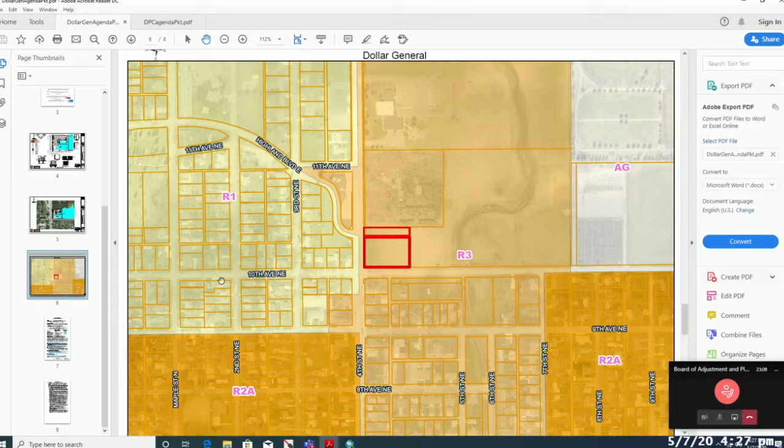The owner of this property is Sandra Jean and Daniel Messelt. The applicant, the buyer of the property, will be Watertown 21569 LLC, owned by Rupi Helmer Group. The property address is 1010 4th Street Northeast, indicated in red here.

The conditional use request is that the applicant seeks approval to operate a neighborhood retail establishment, a Dollar General retail store, in the R3 multifamily residential district, for applications 21-20031 and 21-16034, contingent upon compliance with the purpose of the R3 multifamily district and specific rules governing individual conditional uses.

Neighborhood retail establishment is a listed conditional use for the R3 multifamily residential district. The definition is specific: a generally recognized retail business which supplies commodities on the premises for persons residing in adjacent residential areas, such as but not limited to groceries, meats, dairy products, baked goods or other foods, drugs, dry goods, clothing, and notions or hardware.

Whereas a retail establishment, as opposed to a neighborhood retail establishment, is an establishment engaged in selling products, goods or merchandise to the general public for personal or household consumption, and establishments providing services or entertainment to the general public, including convenience stores, petroleum sales, repair shops, indoor amusement, copying services, health, professional, educational, social services, and other miscellaneous services.

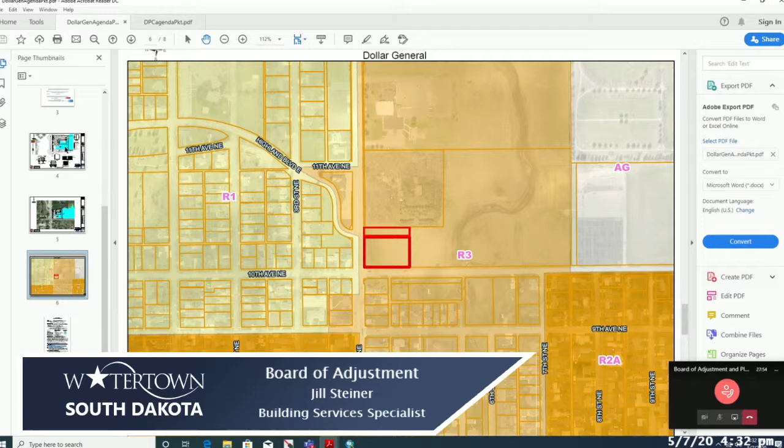So the additional property is for more parking then? It is a change in the ingress, egress. They're going to want to come in off of 4th or the highway, north and south, as you might see here. Before, I believe the parking was a little more to the south, and they were coming in off of 10th Avenue.

Right, because when we had approved it prior, there was some concern about the entrance at that time, which was closer to the corner of 81 and 10th Avenue. That's correct. And then we kind of collectively agreed that they were going to move it back, farther east. And so actually, this would probably work out better the way it looks.

In terms of, and Mr. Chairman, yes sir. Heath VonEye here, I could expand on that. After the previous approval we're talking about, you're correct, we worked through these details on the access off 10th with the applicant, and they were able to meet the required setback from the intersection with that access, but it did not accommodate what they felt they needed for ingress and egress into their site.

So they revised their plan and procured more property to the north to account for an access coming off of Highway 81. The necessity to have that proper setback from Highway 81 on 10th required them to essentially shift their plan and come off of Highway 81. So that's how we've gotten where we're at today, due to that additional property they've acquired for the access off 81.

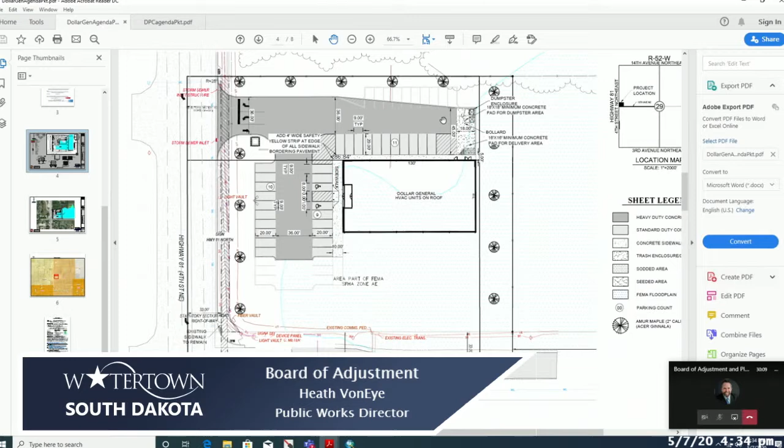I guess I don't know if it's in the packet. I know they provided a turning model, what's called a tracking model, that shows a semi maneuvering into and out of their site for delivery purposes. And it looks to be adequate and appropriate to provide enough space for those deliveries.

Jeff Brink, I work with the Department of Transportation, and at the Department of Transportation we did receive an access permit request for this property. On that request, they go into detail on turning movements and turning radiuses at curb cuts. We look at distances from other intersections as well as the light. So all of that is being analyzed by the state.

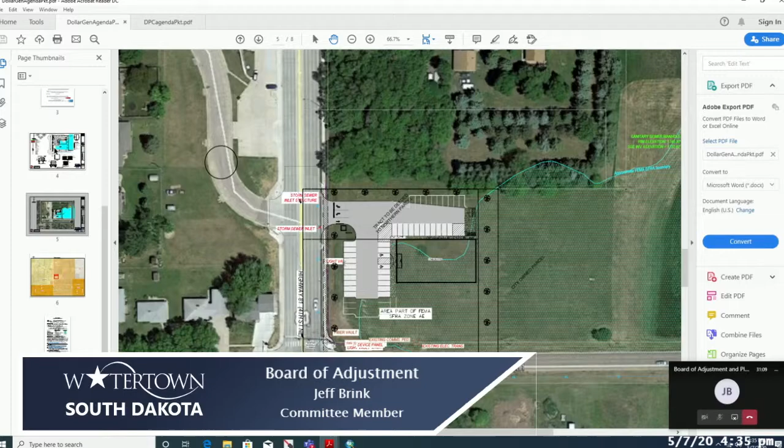The approach location hasn't been approved yet by the state, but we're still in the review process, and I feel like it's very close to being approved. So in those regards, I think at least the DOT feels comfortable with the location of an access and the turning movements.

Mr. Chair? Yes, sir. This is a question for staff: so with the access to come off the highway, if they ever wanted to come and put access onto 10th Avenue, they'd have to come back before this board?

Commissioner Kays, that would be handled administratively under a curb cut permit from the engineer's office. If we were to receive an application for such a curb cut, we would check it against the newly adopted engineering design standards, just as we did for this site's review, to make sure it meets the minimum setback requirements from the intersection, which I believe in this case was about 140 feet.

Thank you. One other quick question: is there going to be screening on the south side of the parking lot adjacent to that residential zone property? Can you see the hand on the screen, Todd? Is this where you're talking about, in this area? There doesn't appear to be proposed trees there, but isn't it a requirement that all commercial uses adjacent to residential uses in an R3 have to be screened?

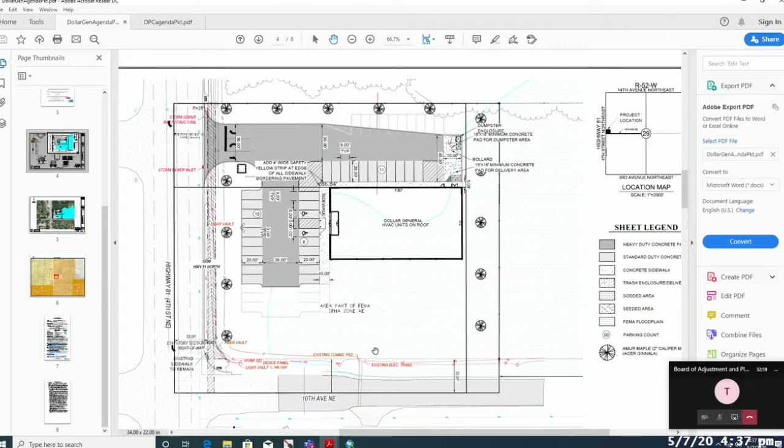I'm asking because I have intimate knowledge of that. How much grass space is there going to be from the south side of the parking lot to 10th Avenue? Would that be enough for screening, just having open green space? But for this area, the conditional use for that land was already granted, so it's just that sliver to the north now that this is really addressing. The conditional use right now is that they're coming in and amending their conditional use, so the question of whether there needs to be screening to the south is still germane.

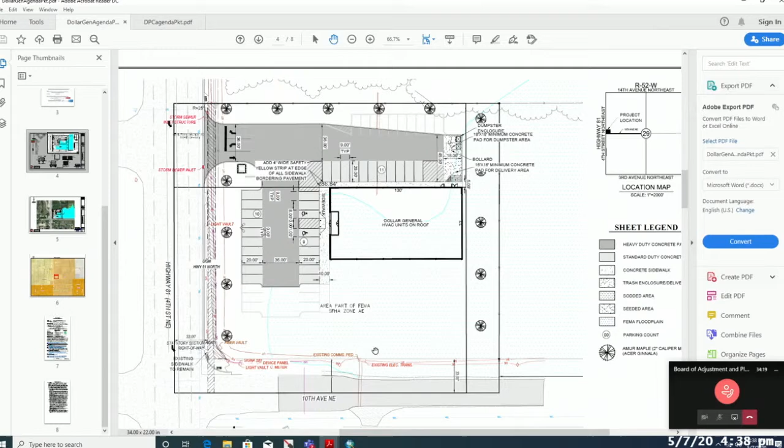Yes, Todd, I'm looking right now in the application, and I'm not seeing it, so that's my question. Right, the ordinance reads that adequate screening of a parking lot from adjacent residentially used properties shall be provided. Where residentially used property is across the right-of-way from a parking area, screening shall be provided in all cases, except when the right-of-way is an arterial. Screening shall be an opaque fence, wall, berm, or hedge maintained at least 4 feet in height and in such a manner as not to materially impede vision at intersecting streets, alleys, and driveways. However, 10th Avenue is not an arterial street, so the question remains.

Are they required? Are they required? Yes, and they're willing to comply. Willing to comply, then we just need to—when the motion comes, there will be an amendment that staff reviews and approves that.

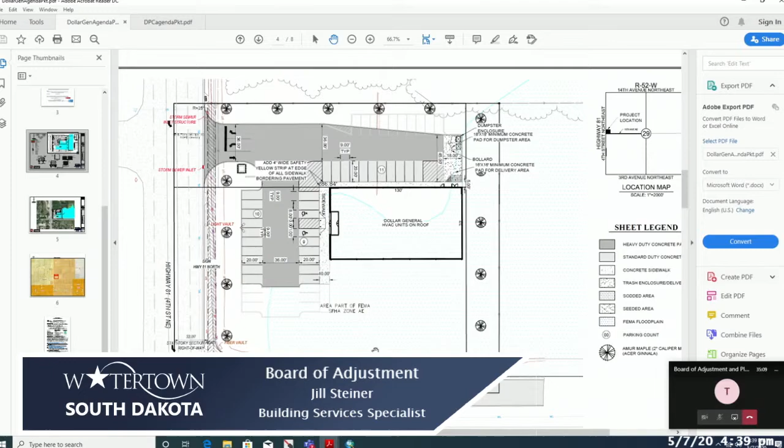One last question, we talked about before—is the floodplain issue being addressed? Has that been addressed, staff? Yes, it will be. Thank you.

I just have a question with the conditional use, and Jill, you had said it's a new application, but the legal description I don't think reflects that—that it would just be, they have the conditional use for that south part because that came previously, and now they're just adding that north part. The legal description for this application that they gave me was Lot 1, Watertown Development Company, Second Addition. This is supposed to be a new application. It's a new application, but basically it's the same as the other one, which was discussed previously, but they did make this change and therefore it's new.

Jill, can you address the parking for me—that they're going to have 30 improved and 16 unimproved? Help me out with that. You see this area that is white—these indicate parking spaces that will be improved immediately for the store. And then along here, you see kind of invisible parking spaces, which help make up the required amount that they need. But in their franchise, so to speak, they don't usually need that many, so what they've done is made the space available on the site plan to show that it's available if needed.

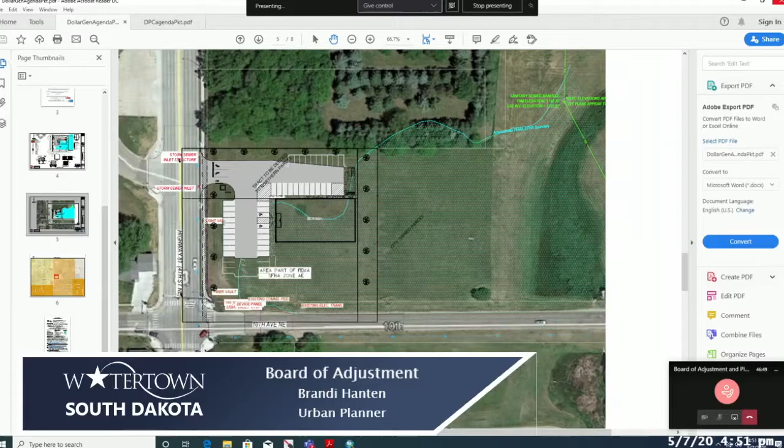Does that work for you, Mr. Kays? I'll retract that condition to the motion. Okay, I'll second your motion.

Could you restate the motion? The motion now would be to approve the amended conditional use permit per the resolution, subject to a sidewalk being constructed along 10th Avenue.

Thank you. Do I have a second? I'll second that. Any other discussion? One question—Mr. Chair, Mr. Kays, does that include sidewalk or trail? Yes. Okay, alright, I think we're ready for a vote.

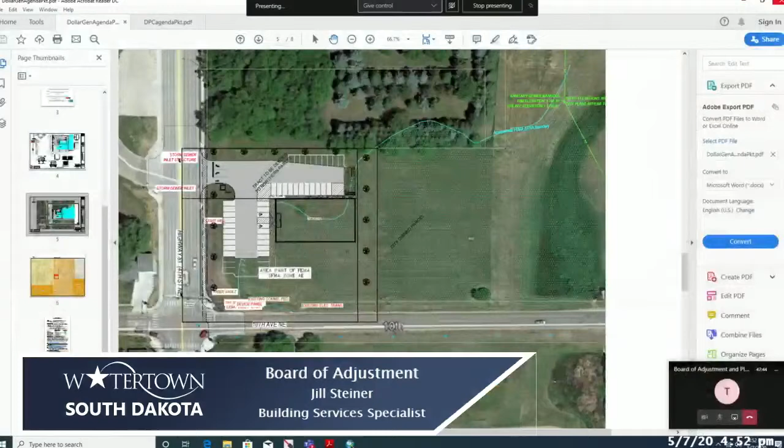Roll call, please. Kays, yes. Oletzke, yes. Hanson, yes. Dargits Johnson, yes. Jeff Brink, yes. Stein, yes. Ford, yes. Motion passes. Thank you. Next item.

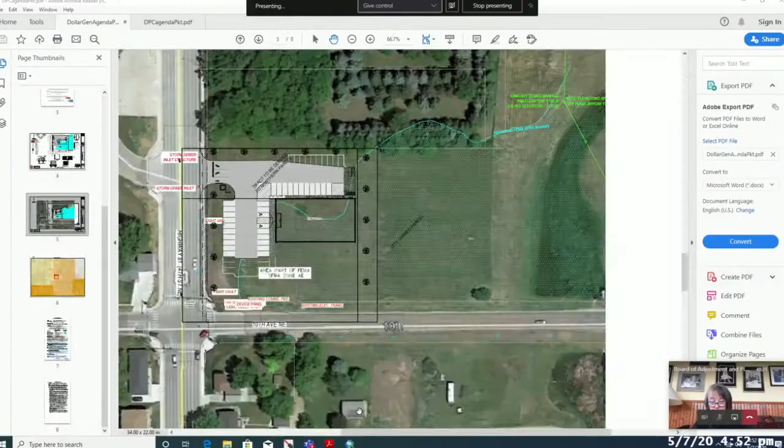This application is by DPC Properties LLC. The property address has not yet been established, but it is located at the southwest corner of the intersection of 4th Avenue Southwest and Oakwood Road, also known as 14th Street West. The application was submitted to construct a non-conforming 7,200 square foot building.

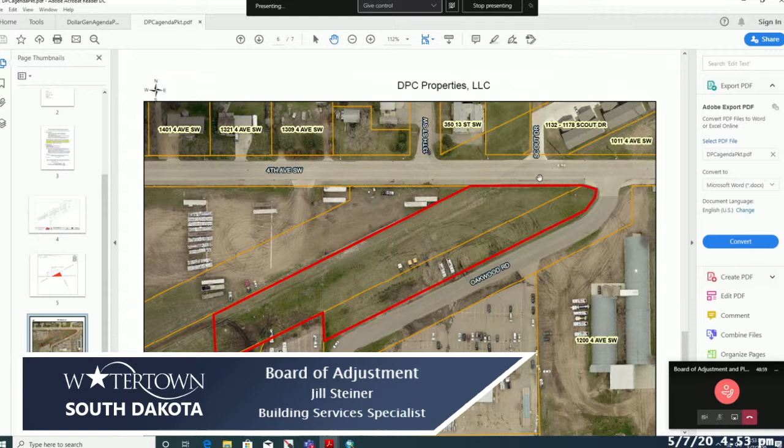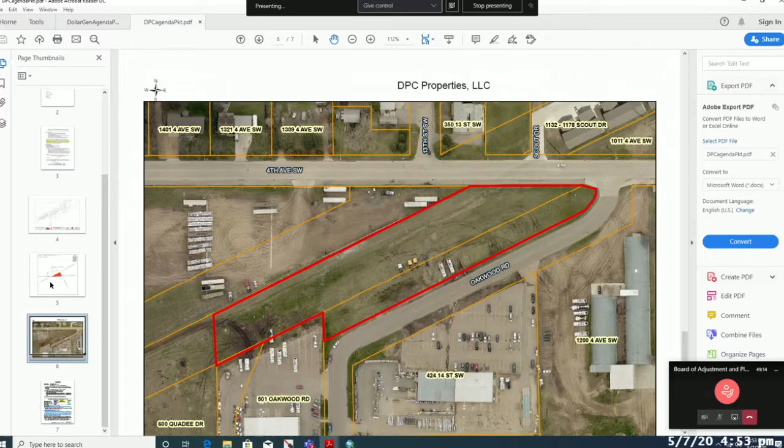The parcel is 106,789 square feet, which equates to 2.45 acres, located in the I-1 Light Industrial District. The structure is proposed to be constructed 36 feet from the front or north property line, where a minimum of 40 feet is required. I will show that here quickly. Right here is the issue.

Staff finds that this is a new development on a bare parcel previously utilized as railroad property. Storage units are a permitted use in the I-1 Light Industrial District pursuant to 21-320214. Storage units are defined as a building or buildings for the storage of commercial or private goods and materials in individual units within a common structure, without water or sewer utilities.

Of note, the following were not addressed in the application: garbage receptacles must be screened, and the path of travel is not shown very well on this, but I do have a drawing that was submitted later that I'll pull up in a minute. All maneuvering of vehicles to access the units must be done on the private property, and outside storage is not permitted here. Screening may be required if adjacent land uses are residential or commercial.

The minimum area a compliant I-1 parcel can have is 13,800 square feet. This substantial I-1 parcel, compliant in minimum area and width requirements, has approximately plus or minus 85,000 square feet of legal buildable area within which to comply with the ordinance requirements.

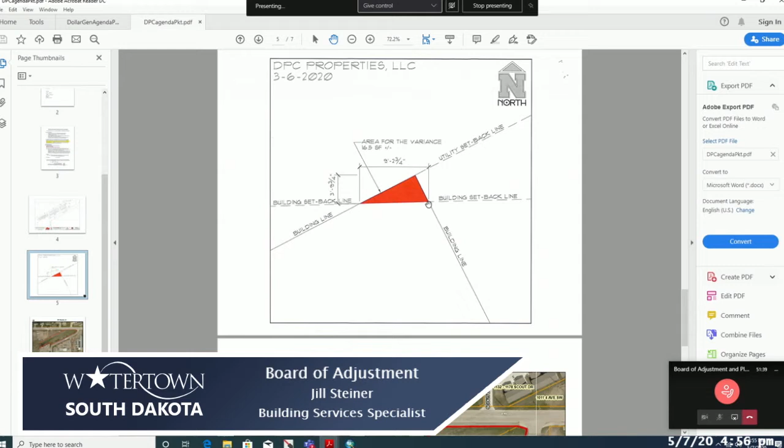It's almost 4 feet of depth here, and the width is about 9 feet, a little more. This is the close-up view of this little corner of the building, which isn't meeting the front setback regulations. So just to be clear, if it weren't for that 16.5 square foot edge of the corner of the building, they would not need a variance. So you're talking 16.5 square feet on an 80,000 square foot plus piece of property.

Yeah, 85,000 square feet of buildable area, so that's minus setbacks. But this parcel is laced with lots of easements, and these buildings are tucked in there between the easements, trying to make them work. All right, evidently there's going to be storage units.

How does staff feel about the ingress and egress off of Oakwood and among the units in the back, would be the north side or northwest side, whatever you want to call that. Are they also going to egress off of 4th Avenue? Is that what I see in the corner there? I can't tell. No, they're only coming in from Oakwood. Okay, what about trees or a buffer or something, because across the street, is that zoned residential or also light industrial? You know, where those houses are, on Fourth Avenue on the north side.

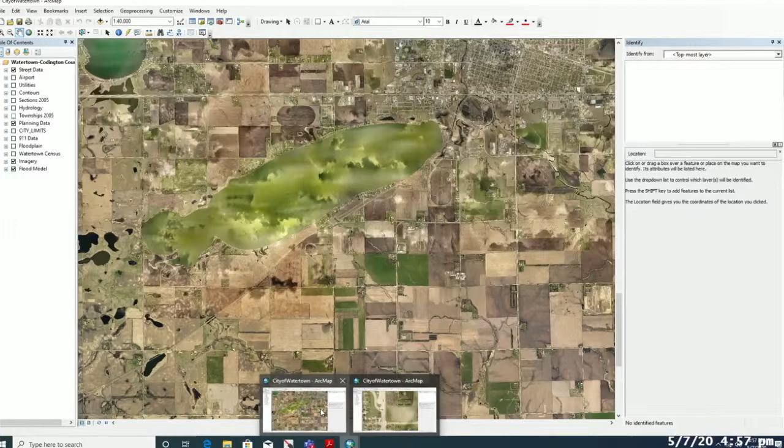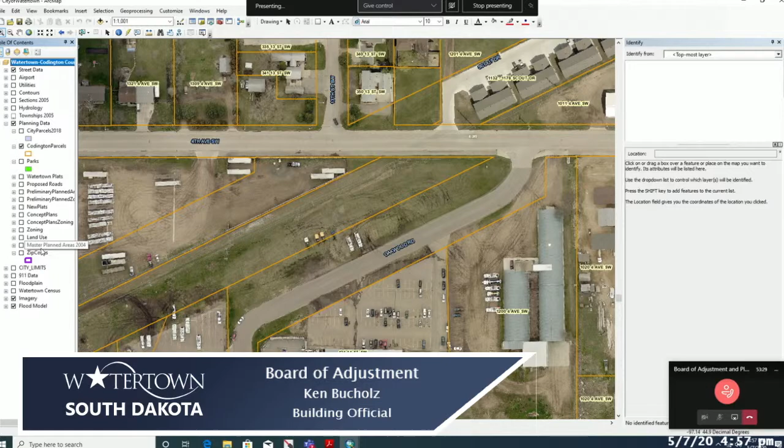So do they have to put a buffer zone or trees or anything on the north side, the part that just hits Fourth Avenue, or not? It's kind of a funny shaped lot. Well, the screening applies specifically to parking lots.

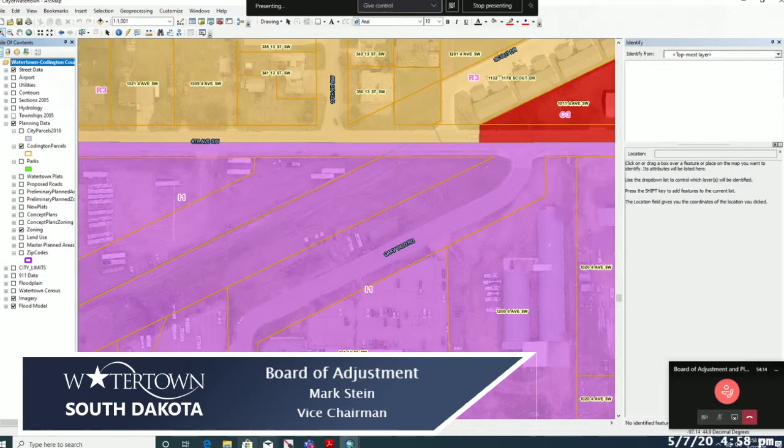So there'd be two entrances then off of Oakwood, if I'm looking at this correctly? Yes. So Jill, on the, I'm going to say north of the 60 by 120 building, it looks like there is a curb cut off Fourth Avenue. Is that correct, right there? It is, right there.

Yes, there appears to be one there. Has that been okayed, do we know, by engineering? Mr. Chairman, Heath here. Yes, sir.

So the details of the site plan have not been thoroughly vetted and reviewed yet. Of course, the application before the commission this evening is specifically the variance for that encroachment into that setback area in the northeasterly corner that was discussed. Subsequent to this action, the applicant would submit to the engineering and planning and building divisions the appropriate commercial site plan and building permit application. On that review process, we would vet in detail any access locations they're proposing, any required paving of those accesses, and things of that nature.

So again, like the building official Ken had mentioned, this is kind of the least obtrusive of all the variances or right-of-ways on that property. So again, if we said, hey, slide it to the southwest, they're gonna have more of an encroachment on that opposite corner then. Correctly? An encroachment on the opposite corner.

So if we moved that structure there again to the southwest, would they have more buildable space? Well, I think their options basically are to lop off a unit, or at least about 4 feet, or just make this a little chopped corner that's been done, or allow the variance, grant the variance.

And if I'm understanding correctly, they can't slide that building down by 4 feet because you're over an easement or some type? Because of this, this is a utilities easement, right? It looks like they've got these buildings wedged right in between all those dotted lines. Actually, oh, that's easement here, yep.

Yeah, you're correct. Shifting that to the south or southwest, you'd either be encroaching that easement or the front setback at that point. So I think the options that Jill described are probably the primary ones for the board to consider: either a modification in that corner of the building to be compliant, or a modification in that northeasterly wall and bringing that in entirely, narrowing up the building, or a granting of the variance. Those are probably the three main options we're looking at, at least with the information we have in front of us.

Jill, can you explain how the building, the 30 by 200, doesn't show access to the drive? Yeah, we noticed that as staff. I think it was just missed in the drawing. There's no reason why they wouldn't connect these.

Did they have the updated site plan too that maybe showed that? I did. The thing is, I can't connect to the end drive. Oh, well this is from the website, just taking the packet, so I apologize for that. Well, if you refer to this one though, it looks like it adjoins that other parking lot.

So is that how they think they're going to get access to their property, going from the 501 Oakwood property? Because their property does actually jog back. I don't know how they would get to it. Do you see what I'm saying? They can use the setbacks for driving though.

So they would be able to connect that building to the west within their site. Yeah, actually, the two other buildings that aren't requesting a variance can be permitted right now after it gets vetted through us and we agree to the access points. I'm just wondering why they didn't show how they're getting to it, that's all.

Because that's not the building that we're focusing on either. No, I'm just looking at the whole plan and it doesn't show it, that's all.

Isn't anyone in the virtual audience here to speak on this? Matt Redlin, for instance? Yes, this is Matt with Landmark Builders representing DPC Properties. Let me open the public hearing first. Open the public hearing. Anyone here to speak on behalf or against this item? Please go ahead, Mr. Redlin.

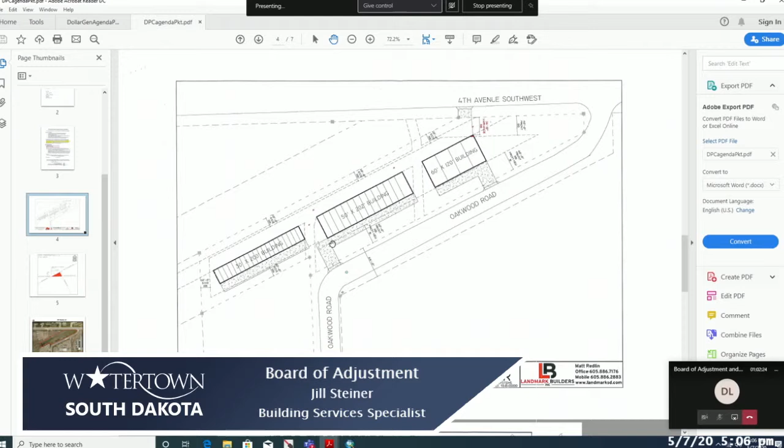Mr. Chairman? Yes, sir. To address commissioners' concerns on the access to that westerly building, I would emphasize that is another point we would look at and review, to make sure requirements are met to have a paved access to that structure. It would be as simple as expanding their proposed concrete paving limits shown on this plan in order to have connectivity between buildings 1 and 2. We would certainly address that administratively at the site plan review level.

All right, thank you. Anyone else to speak on behalf or against this item? Hearing none, close the public hearing.

It seems like the item before us is fairly straightforward. Either allow them a variance for 16 and a half square feet to utilize a piece of property that would otherwise be difficult to see what you could do with, given all the easements they'd have to work around and build around, or not grant the variance, and then they'd have to make a little bit of a funky shaped building on the corner.

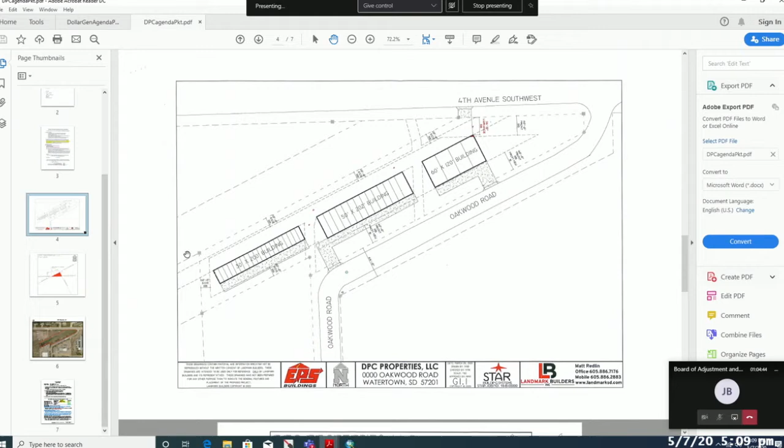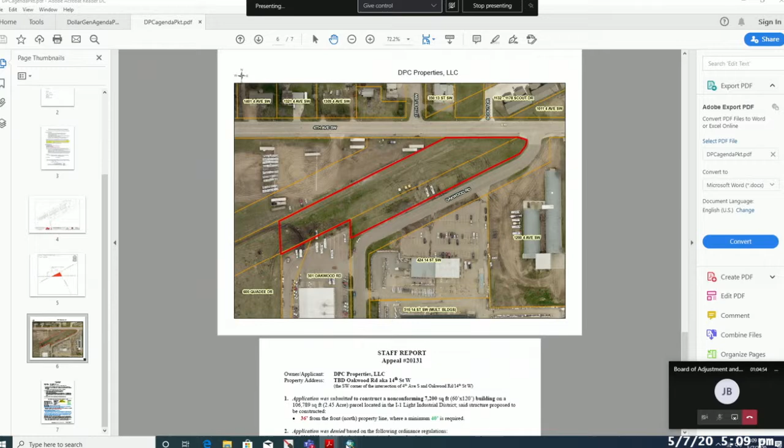Jeff Brink here. When we got the packet, I went out and looked at the site, and the property directly to the north of this, on the other side of 4th Avenue, is a very similar shaped property. I believe that one encroaches even closer, and I know there's a zoning change between the north and south side of the road, but that building is closer to the road. For that reason, I feel this applicant is doing the best they can to meet the intent of the rules on the 40-foot setback. So I feel this is the best scenario they could accommodate.

Yeah, I'm looking at that R3 duplexes there on that screen. Mr. Chair, this is Kays. I also concur that due to the uniqueness of this lot, i.e. the easements that are there, it makes it difficult for anything to be constructed. I think there's perfect reasoning for granting a variance. Thank you. Any other comments?

Take a motion on this if anybody would care to. This is Jeff Brink, I would like to make a motion to approve the variance as presented. Thank you. Do I have a second? I'll second. Ford, second. All right, thank you.

Roll call vote: Brink, yes. Ford, yes. Oletzke, yes. Stein, yes. Kays, yes. Dargis Johnson, yes. Hanson, yes.